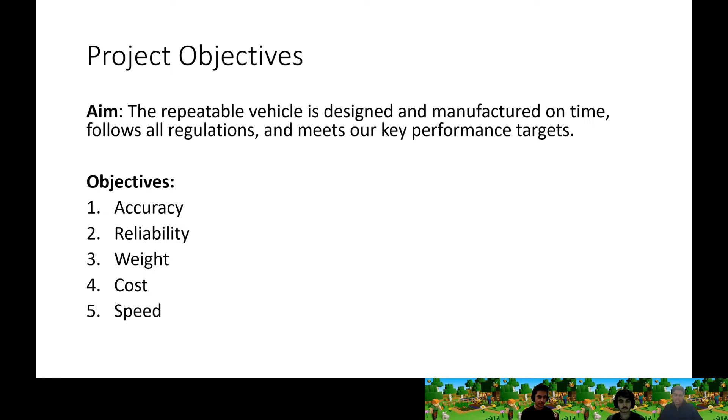In this presentation, we'll be detailing our final design for the IMechE 2021 Design Challenge of creating a repeatable vehicle. We began our design by outlining our objectives and our aim, which is to design and manufacture the vehicle on time whilst following regulations and meeting our performance targets of accuracy, reliability, weight, cost and speed.

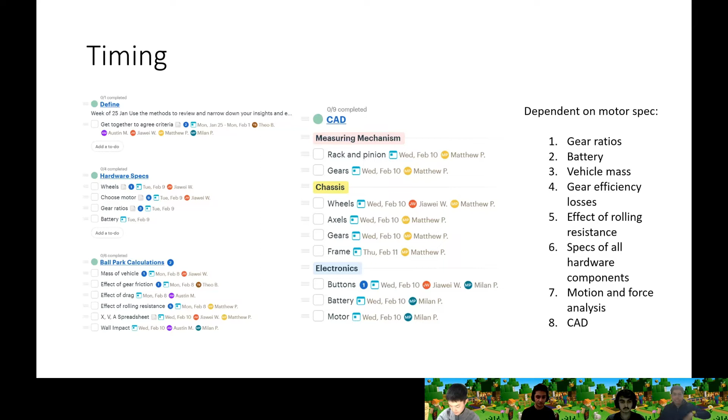It was clear that timing was crucial to the success of the project. Numerous tasks were dependent on the motor spec being outlined first, so that was an important consideration we made early on in the design. When we began designing our vehicle, we had to calculate a rough estimate for the mass, and we did so by using resources on the internet. Then we looked at the specific components and calculated a new revised mass.

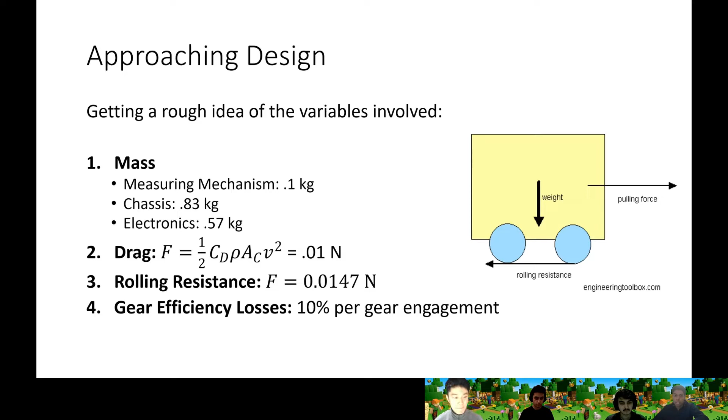From the beginning, we found the drag forces, rolling resistance, and gear efficiency losses in order to help our calculations later on. Our success depended on the vehicle hitting the wall and coming back to the target which it started on. We found a minimum speed at which our vehicle was to travel, and we designed our gears to meet this standard. And all our components for our vehicle fit within a £30 budget.

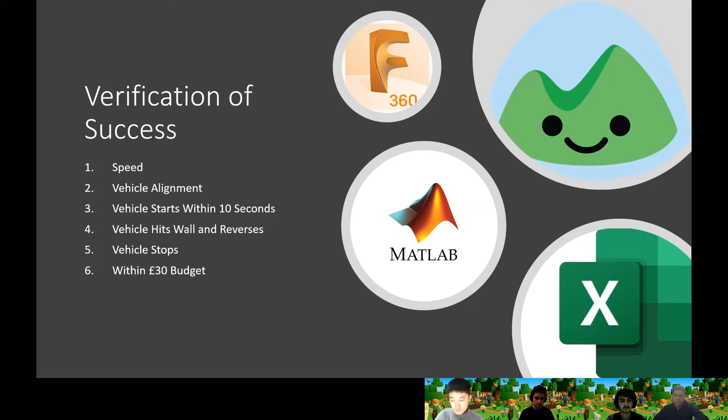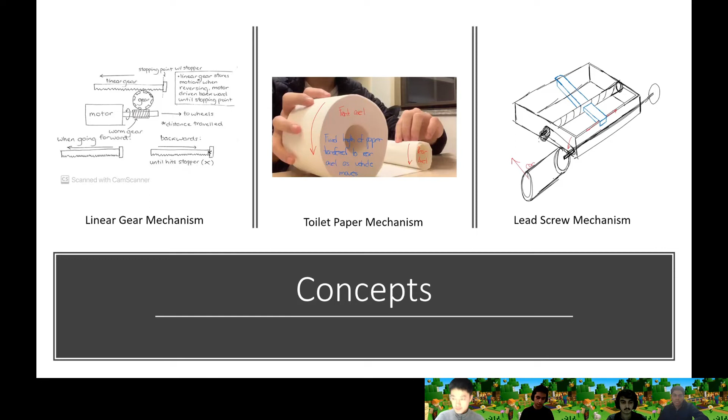For our final concept, we chose the linear rack and pinion system. We chose this because it was the mechanism which had the fewest components, hence had the fewest points of failure. Fewer points of failure also means less mass than the lead screw mechanism, but not the toilet paper. It requires less torque, achieving our estimated top speed of 0.1 meters per second, whilst also being easily within the budget.

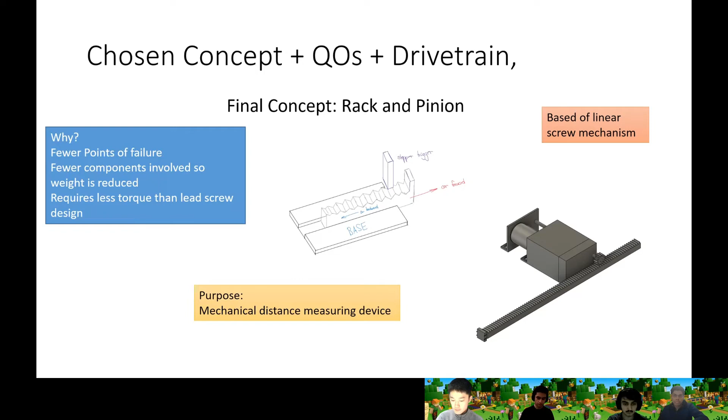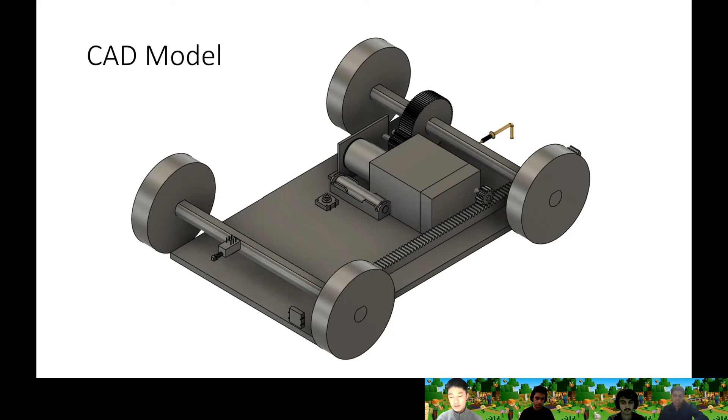Here's an explanation of the linear gear mechanism. You can see the motor powers the linear gear and also the axle. Let's talk about the axle. When the motor turns, it turns the axle, making the vehicle go forward. Also, at the same time, it turns the linear gear, moving it away from the stopper button. When the vehicle is reversed, the wheels are reversed, the axle is reversed, and also the linear gear goes backwards in the opposite direction. Thereby, when it hits the limit, it presses the button, stopping the vehicle.